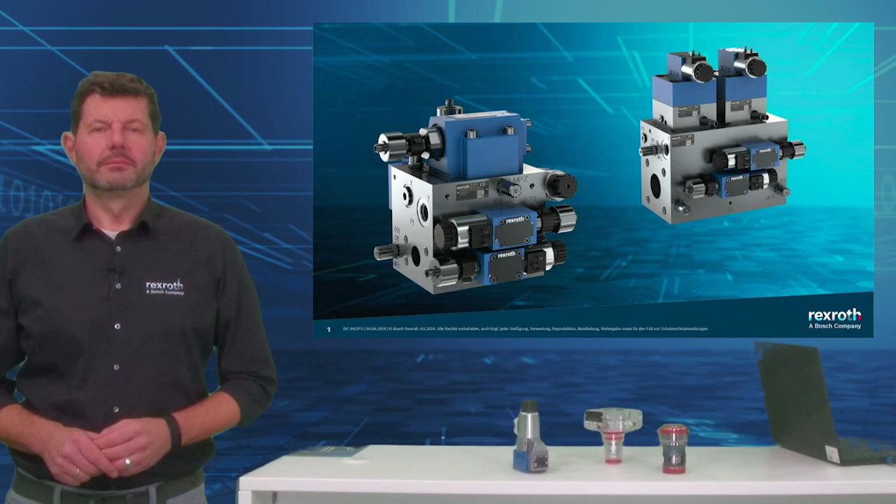In the next 45 minutes I will present you the topic together with our expert concerning system safety in manifolds.

Now it's also time to bring our expert into the discussion. Hello, and it's a familiar face, you may remember him. Hello Marvin. Hi. Great to have you back.

It's almost 1 year that we talked about HSR manifolds and functional setup. Today you focus on the topic of system safety, and we talk about a specific range of products, right? Correct. Today, first of all, also warm welcome from my side. My name is Marvin Mehling.

I'm the responsible product manager for industrial manifolds, and today we will first of all try to build up a common base on the functional safety in hydraulics, and afterwards we will present our newest member in our manifold products family, the so-called STO manifold. Okay, and that means safe torque off. That's what I already learned.

For those of you that are maybe not too deep into the topic of machine safety, I think it's also very much driven in Europe and Germany. I know, that's what I also saw. But I think it would still be worth it to invest some minutes to have a first step into the topic, explain a little bit what's behind that, and then we will go. And again, as always, I would like you to have some application examples, so not only talk about the product itself. Of course.

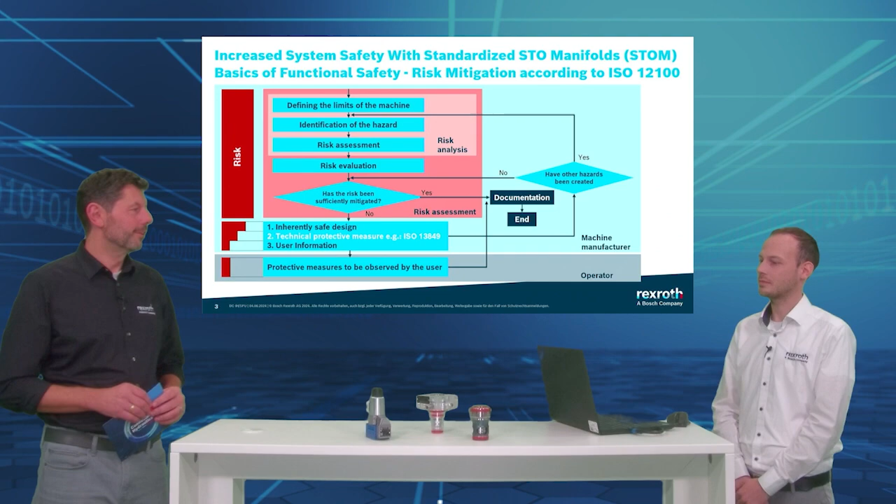So thank you, Stefan. Yes, functional safety in hydraulics usually doesn't matter if we are an OEM and try to build a machine, or if you're an end user and try to retrofit a machine. Anytime we are building a machine, we come to the point of risk analysis and risk assessment of this machine. So we have to get aware of what can happen in terms of personal safety. Can anybody stumble and fall? Can anybody reach out his arm into a dangerous zone of the machine?

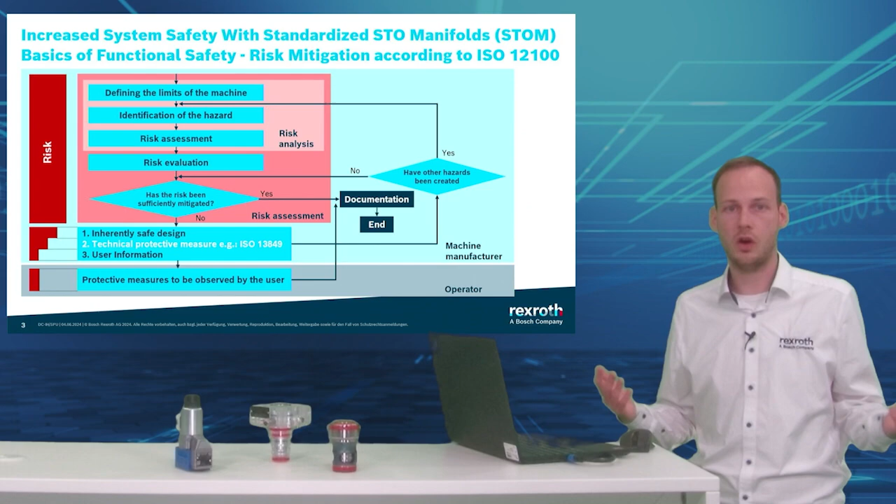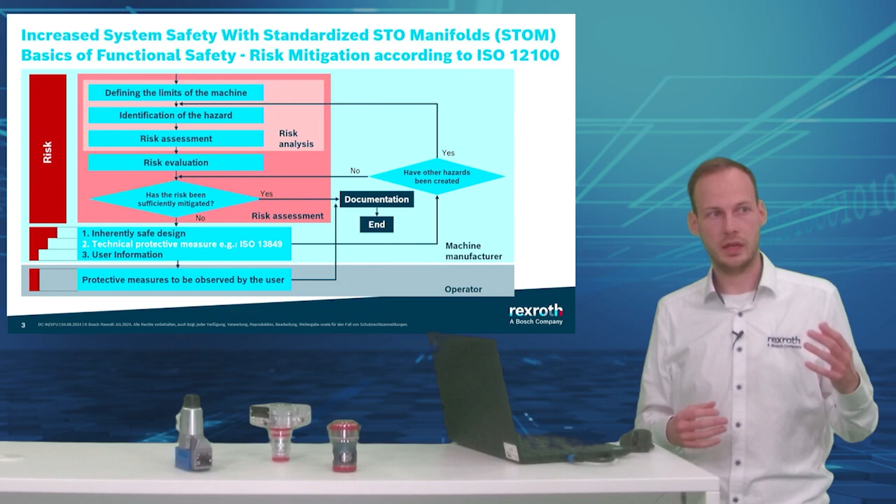And what can we do about this to try to eliminate or reduce the risks and hazards that we have within the machine? When we are in the process of risk reduction, we have several options. First of all, we try to design a machine as safe as possible, meaning if we are able to prevent risks at all with, for example, a fence where I cannot get my arm through, then this will be the first level of solution.

Second level of solution, and this will be our main focus for today, is a technical protective measure. According to different norms, we are capable of using, for example, a light curtain that, if it's activated, gives a signal to an electrical control that afterwards will activate or deactivate valves, cylinders, in order to stop the motion or the risk within the machine, and like this try to make the machine safe. And all of this can be summed up and calculated in a so-called performance level. So how high is the risk of one dangerous failure within a certain time?

And last but not least, a measure of user information. So the last option is, for example, to have information, wear your safety glasses to prevent dangerous situations. And this is, of course, in the responsibility of the operator at that point.

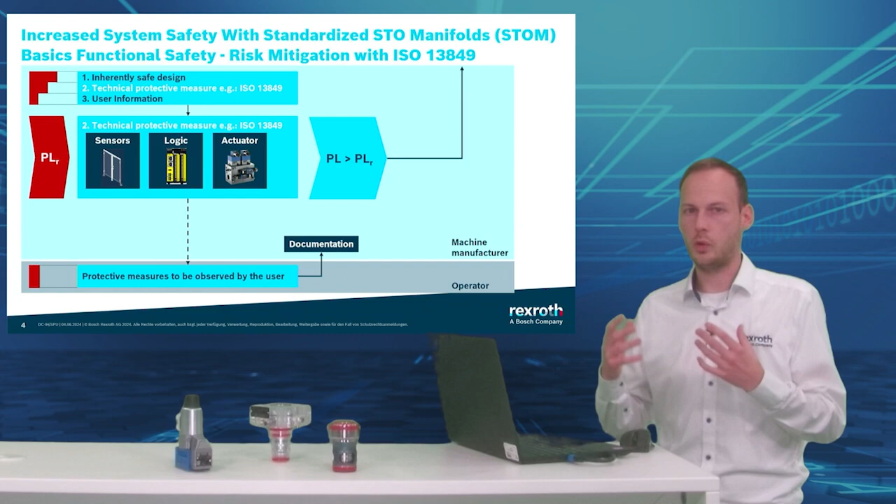But if we now concentrate on the functional safety side and the performance level topic, then we always have the topic of trying to identify the required performance level to make the machine safe. And this can be done with a so-called risk graph. So we're going through the risks that we have and try to identify, do we have serious injuries if something happens, or reversible injuries? How often does the worker step into the dangerous zone of the machine?

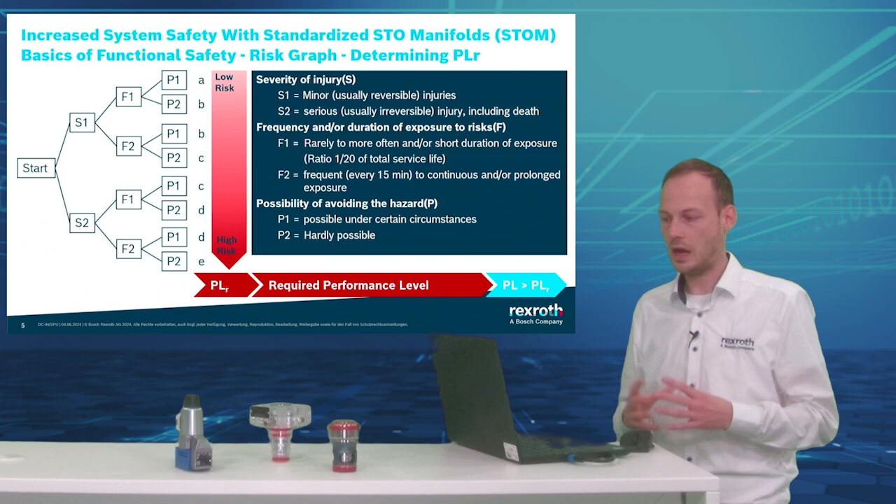And is there the possibility of avoiding this hazard depending on the machine? And like this, we come to a required performance level in level C, D, or E. And this in the end determines how much effort we have to bring into the machine in order to make it safe. Mm-hmm. So I think this was a very good and picturesque description of a complex topic, but thank you for that already.

I would like now to bring you in and have a question for you, because we want to understand on what level you are in this topic. So the first question would be, how often are you facing issues with machine safety in your systems? Is it something that you basically deal with every day or every project that you have, or is it something you think about once a month, once a year, or is this something that never occurs in your business?

Which would surprise me, but let's see. Okay, so we have about 100 participants. 1/3 has voted yet, and it looks like half of the people that have voted have it with every project, every machine, and then declining once a month, once a year. So still, I think not everybody is dealing with that every time. So I think it would be interesting to see that.

And the follow-up question would be, what challenges and hurdles do you face in the context of machine safety? We have a multi-select here. So you can select all these possible answers, like identification of hazards or safety measures, determination of the level. Yeah, we learned there are some different performance levels, and also proof of safety of performance level. So this may take a little more time to answer. Let's see.

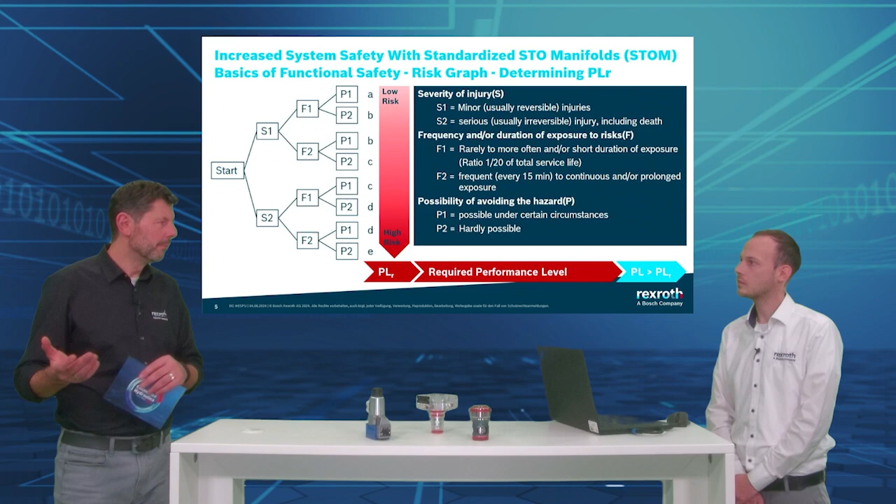Now, talking about safety as a topic, I think there's even more to learn about. We have even a web seminar we will talk about later on that we've done already. So we won't go into that too deep. We'll now switch a little more to the products and to the manifolds that you are responsible for. So STOM, Safe Torque Off Manifold, is kind of an individual product group you are now setting up, right? Correct. It's a whole new product family, and we will try to explain it from the system side.

Okay. So, for example, if a customer has a larger or even central oil supply, then usually we have different machines or machine sections that should be individually hydraulic controlled. And the STO manifold acts as an area shutdown to interrupt this hydraulic pressure supply from the volume flow, also from the pressure side. And in the end, with this, try to help you fulfill your requirements on personal and machine safety according to the norms that are there, the ISO 13849 and up to category 4 and performance level E.

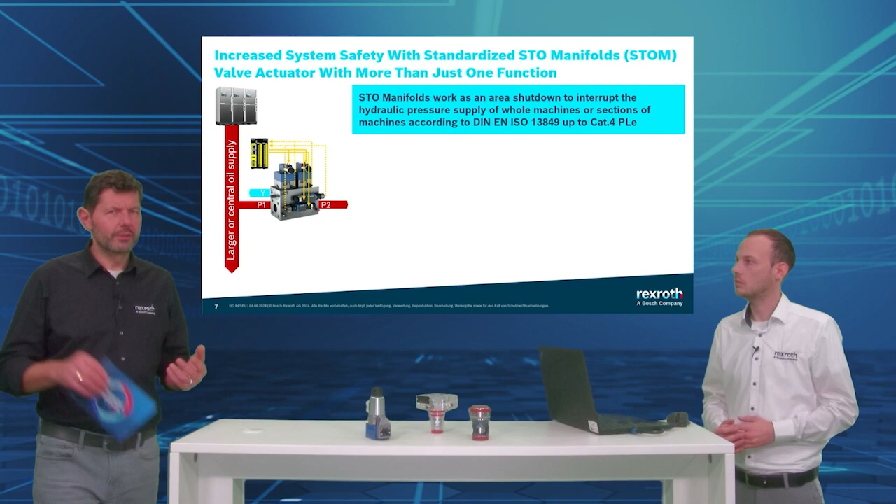Again, category 4, so performance level E, I understood this is the highest possible. What about category 4? So different performance levels can only be achieved if you have a certain system architecture within your system, meaning that, for example, one valve to shut off the manifold is not enough to reach the highest performance level. So the category describes that we, for example, need 2 of the valves and both of them monitored in order to fulfill the performance level E, that, as you said, is the highest level of safety that we can reach in the functional hydraulics. Okay.

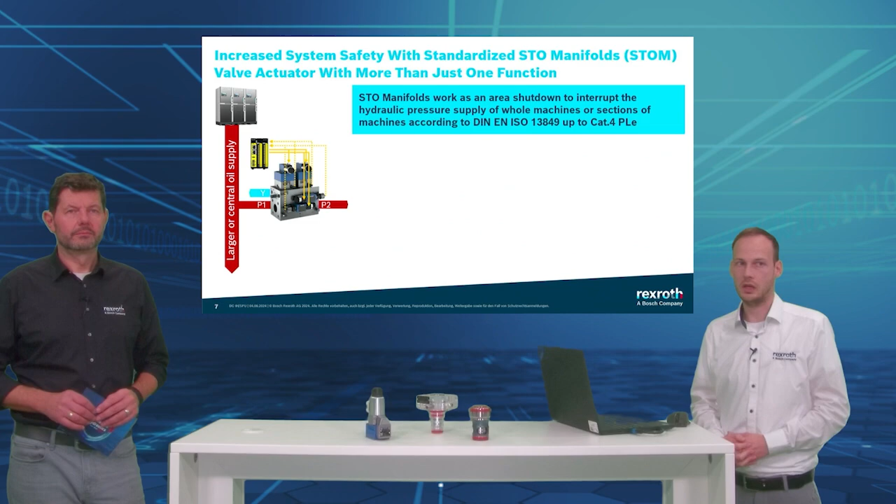If we go on, now what does the manifold do? The STO manifold, as we told, is able to fulfill a safe torque off. Safe torque off is, of course, an electrical term, and in hydraulics we would maybe call it safe energy separation, meaning to cut the flow of the fluid, to cut the volume flow, the pressure of the system, meaning we cut it off from P1 to P2.

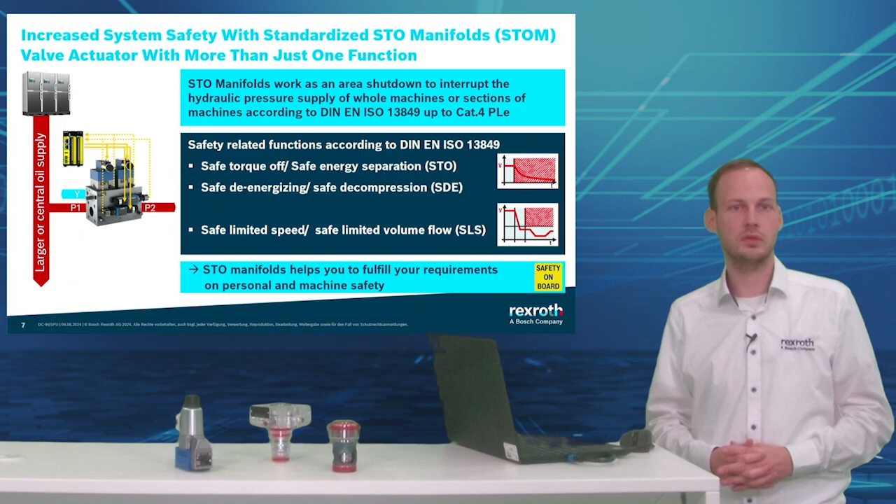And as a sub-function of this STO, we also have a SDE function within the manifold, meaning a safe decompression. So the P2 line will automatically be also decompressed to the leakage port. Our North American colleagues may know this as block and bleed function. And last but not least, we also have the option to use the manifold as a safe limited speed, or because we don't have a cylinder here, use it as a safe limited volume flow function. So in the end, we will help fulfill personal and machine safety requirements according to the current norming situation.

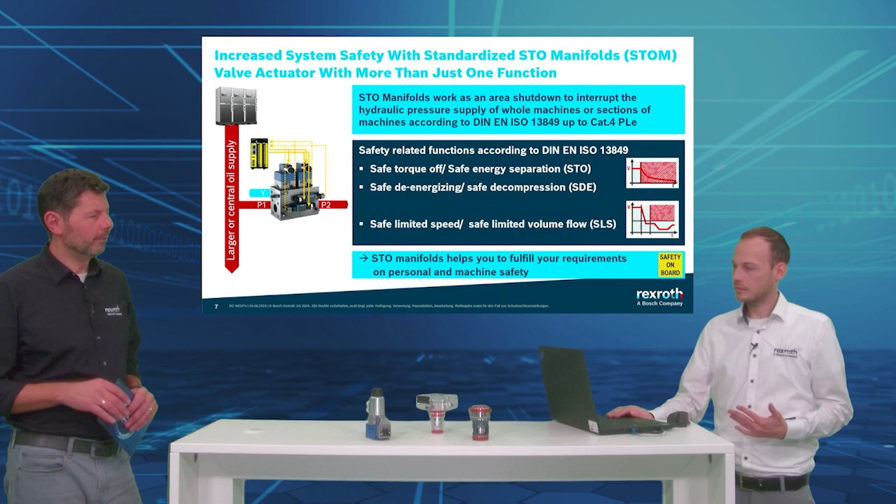So talking about the products, let's maybe give an example. I think you prepared one example. What kind of applications are you focusing on here? Yeah, giving more pictures. I think the main applications would be, as I said, central oil supplies, testing areas, metallurgy plants, really where we have volume flows higher than 200, 500, or even 1,000 liters a minute.

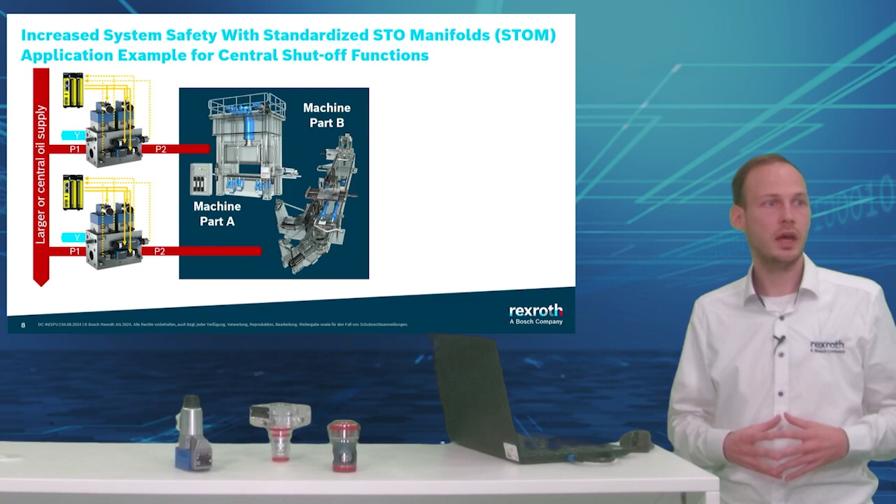Where hydraulic really is fun. Yeah, definitely. And if we look at that, the task is that we usually have different machine parts within the whole area or within the whole plant. So the STOM enables us to block these machines or machine parts individually. And by that, we are capable of blocking, for example, machine part A, while machine part B is still operating.

In machine part A, we can do a safe loading or unloading, a safe maintenance, or even retooling the machine, while, as I said, machine B is still operating. And this, in the end, doesn't only give us machine safety, but also can increase our system availability. Okay. Before we go into the system setup, I think you want to now show the different phases and how it contributes to the benefits.

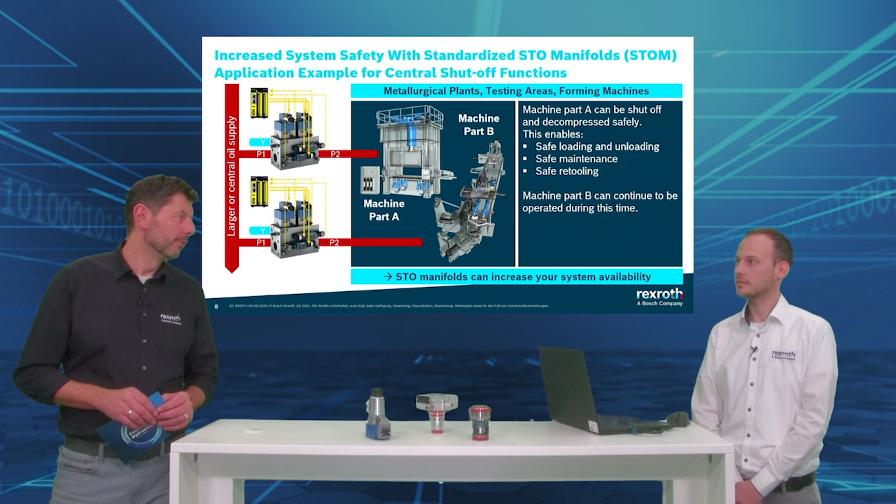And the last question concerning the levels. I saw that 20% said it's hard to identify the level, but if you have, which required performance level concerning the safety function is relevant for your work? And it looks like, okay, it's changing a little, but still PLD, performance level D, is kind of the majority, and then it's mixed between C and E. So a little different to Germany. I think here the topic is a little more focused, but still quite high.

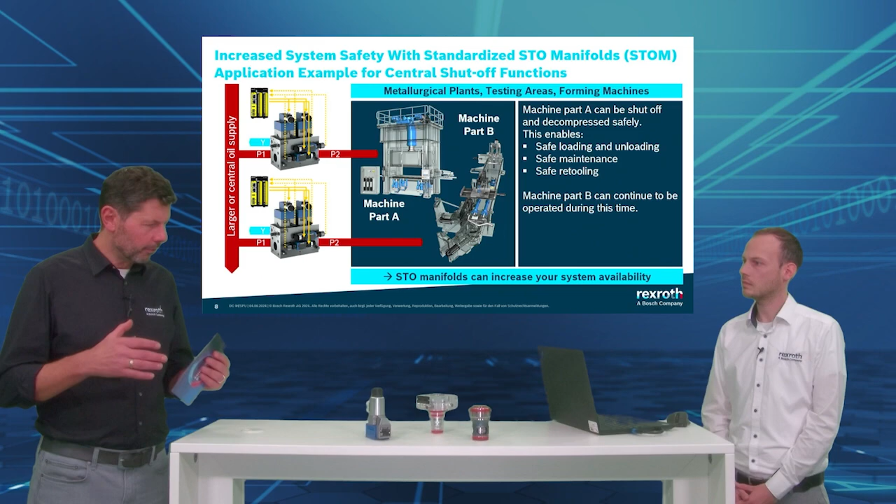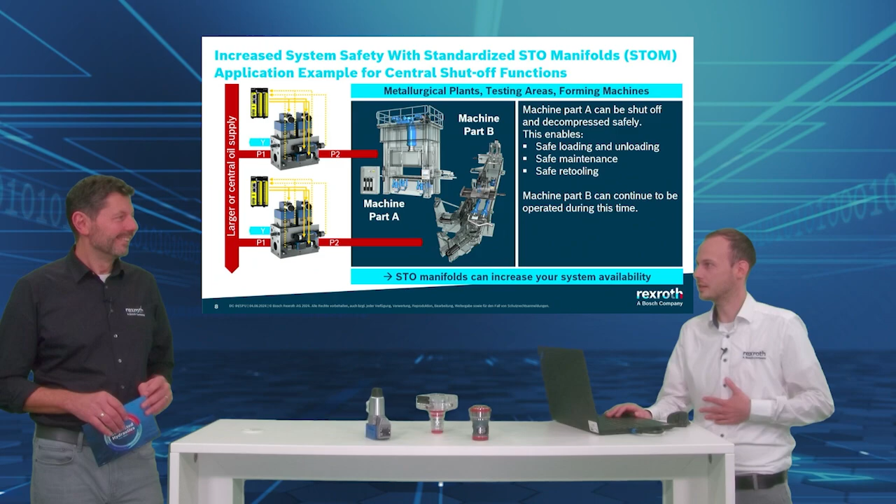Yeah, very good feedback, definitely. We will relate to it in a second. Okay, now from a typical system setup, you will go through the phases of functionalities, starting with the idle state. Yeah, definitely. So we are hydraulic people, so we also would like to understand the product from its schematics.

What you can see here is the schematic of an STO manifold capable up to category 4 PLE. On the upper side, you will see the two main valves, active logics, called LC2A in our language. And on the lower side, we have two more size 6 valves to do a bypass function. Of course, in the default state, all of them are de-energized. The spool monitorings are active and giving a signal.

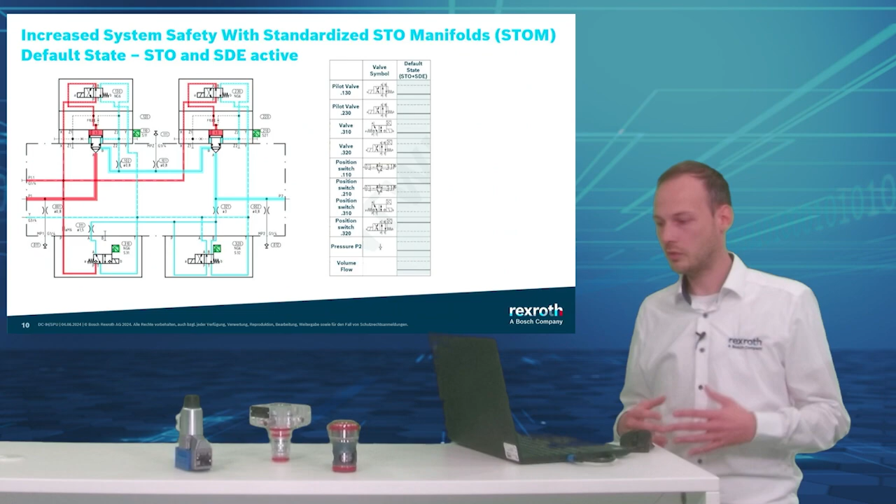And I marked it in different colors. From the P1 side, we have pressure that is used to also close the valves safely, while the P2 side is decompressed to the leakage port, and that's the default state. And if we want to start up the system, we usually have a topic in bigger and central oil supplies. We have big dead volumes, long pipes with bigger diameters, meaning just opening the main valves will give us hard switching strokes.

That's why we implemented the bypass functions: when we activate both of the bypass valves, we are capable of doing a pre-compression of the P2 line, meaning we slowly build up the pressure within P2 until we have the same pressures in P1 and P2, and only afterwards we start up the main valves and therefore the system. This gives us the possibility to damp switching strokes, increasing the lifetime of our components, and of course reducing noise.

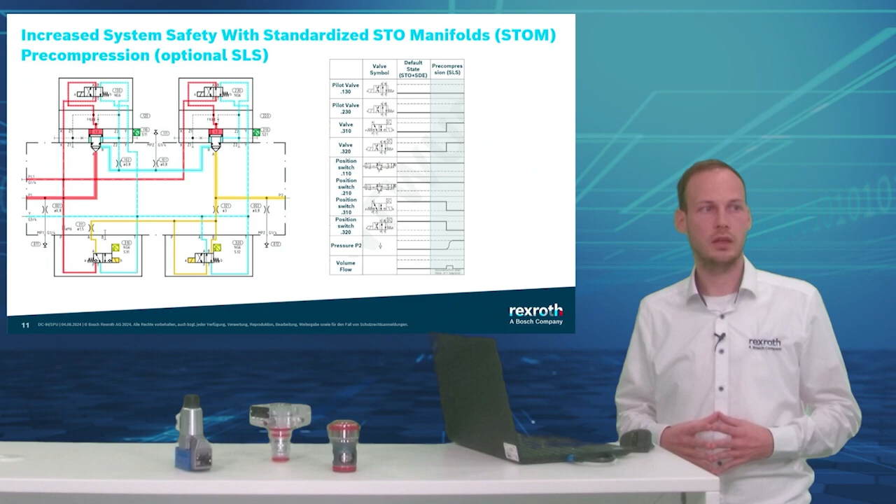To show you this in real life, we also brought a video from our test bench where we tested our manifolds before start of production, and that's what we want to show you now in the next short video.

In customer systems, metallurgy applications, we have dead volumes of several dozen or even 100 liters, which will increase the stroke, of course. Could even be more effective. And therefore, these pre-compression functions are very, very important in central oil supply. I like it also visually, could really see the level of noise, but also the deepness of movement.

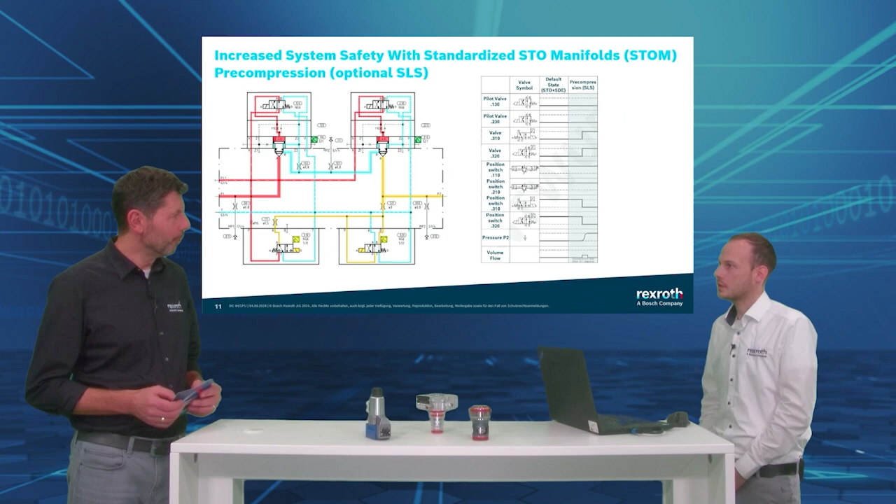And yeah, so this was pre-compression, and now we go to the free flow state. I think this is full throttle, right? Of course, full throttle. So after we did the pre-compression, we of course want to have the free flow. Therefore, we open the two main valves. They are fully opened, and then we can go through the manifold with full volume flow. Doesn't matter if it's 300, 800 or 1,000 liters a minute.

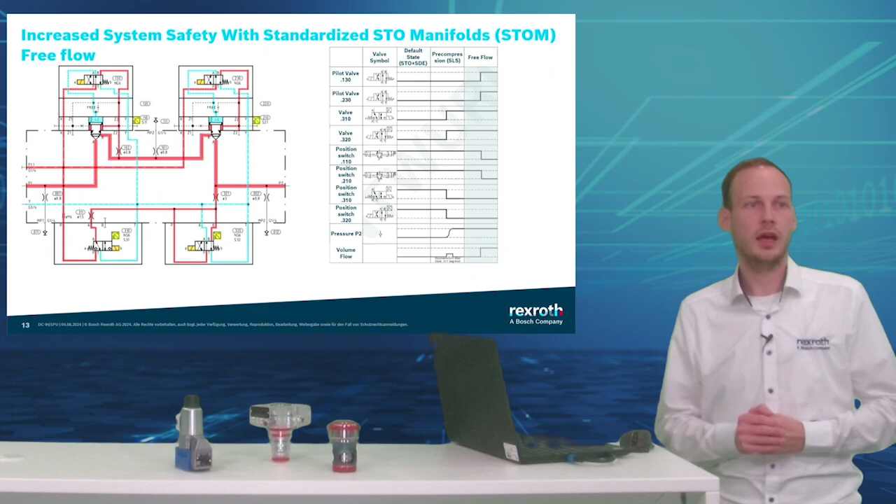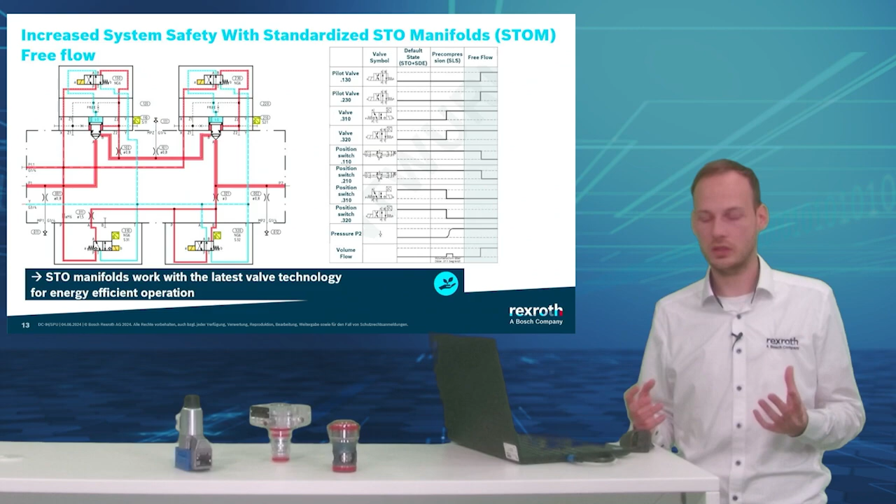So what's important at that point, of course, energy efficiency. With our STO manifolds, we work with the latest valve technology to really have the most energy efficient operation. You can see the flow characteristics for each size of manifold. So our manifolds are not only available in one single size, but in different sizes to fulfill the required volume flows in your system.

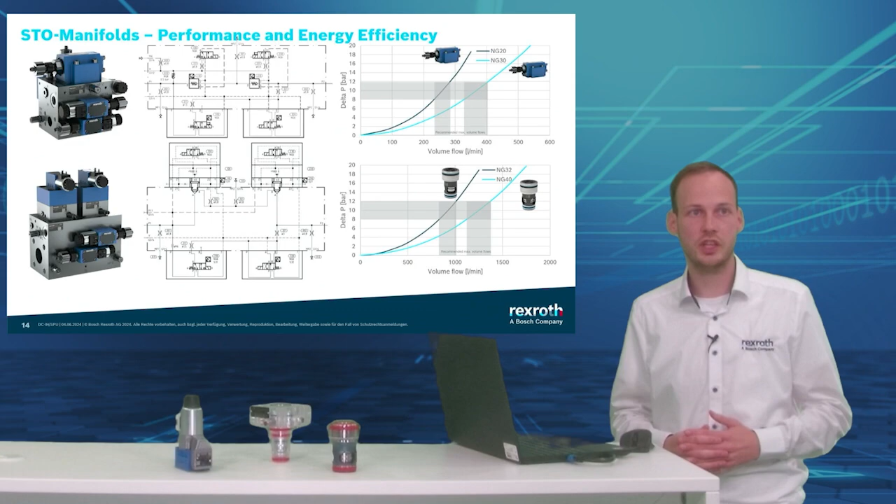Meaning on the lower side, you can see the one in size 32 and 40 with active logics, and on the upper side, you can see the smaller manifolds with unlockable check valves in size 20 and 30. What is the typical flow area? Is this the gray ones? I think typical flow areas will go from 200 up to 1,000 liters a minute. So have a look at 1,000. With 1,000 liters a minute, we will have around 12 bars of pressure loss with our active logic valves.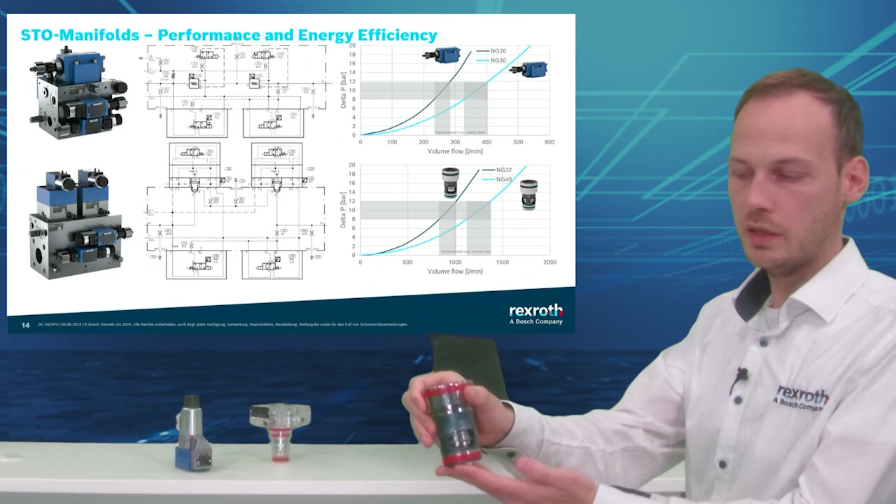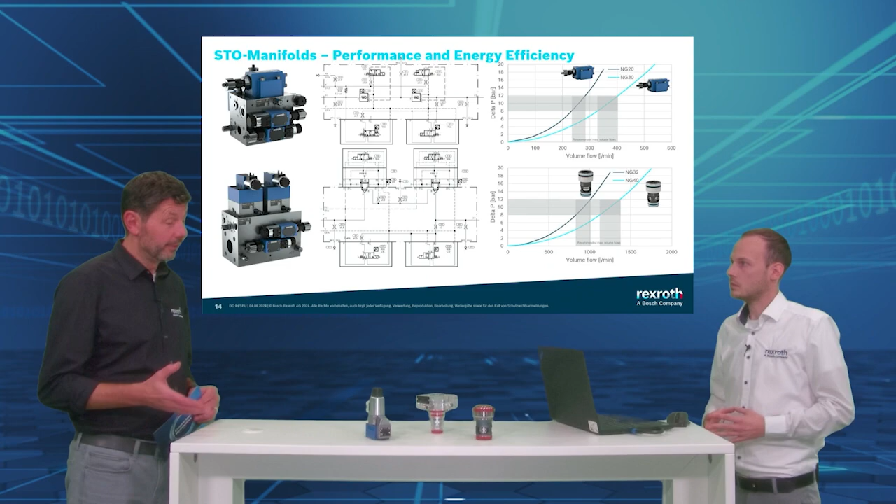Now, what's special here? With our active logic valves, we work with the newest series, meaning we not only have a standard hole, but it is more like a long hole, and therefore gives you energy efficiency increases of around 30%. That's a lot. Wow. If we think of the volume flows that we have here. So that's already really impressive. Also, I like the demonstration of the sound difference, and the movement obviously is a lot better for the system.

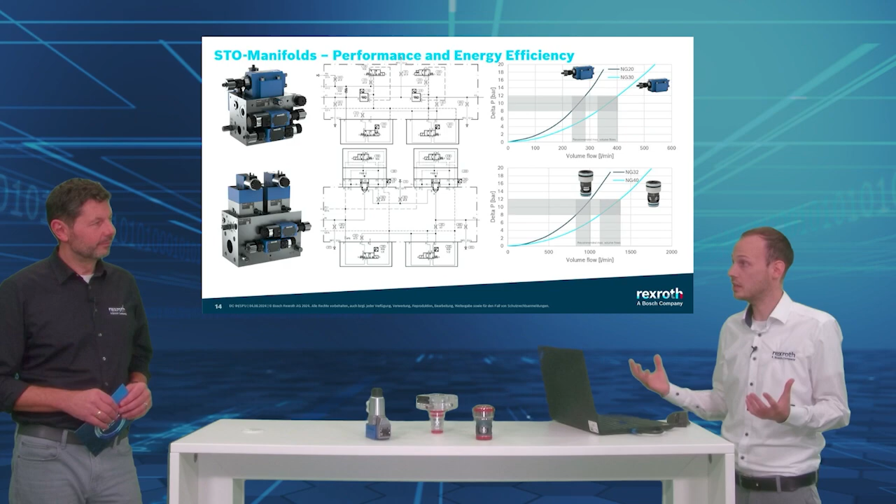So already a lot of nice efforts and benefits, but still we haven't talked about safety too much. Correct. Of course, if we now really put our hand into the light curtain, we come into the fail-safe mode. Before we do that, I will have to add one information to also give you an easy integration into your system. We solved the manifolds from the design side with P1 and P2 in one single axis. This gives you the possibility to have an easy and quick installation from the hardware side, and also from the electrical control side. All of the manifolds, doesn't matter what size, are solved identically. So once you have the code to operate the manifold, you can double it, doesn't matter what size you have.

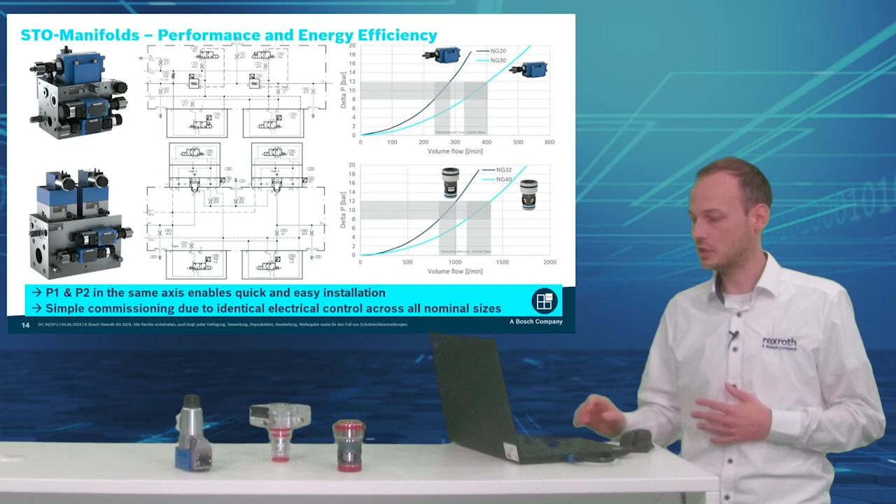And now we come to the fail-safe mode and look at that from the schematics. So if I put my hand into the light curtain, all of the valves will directly be de-energized. This means the two bypass valves go into default state and will directly decompress the P2 line to the leakage port. Secondly, the main valves will also be de-energized, and they will not only shut down passively, but they will be actively pushed from the P1 to close as fast as possible.

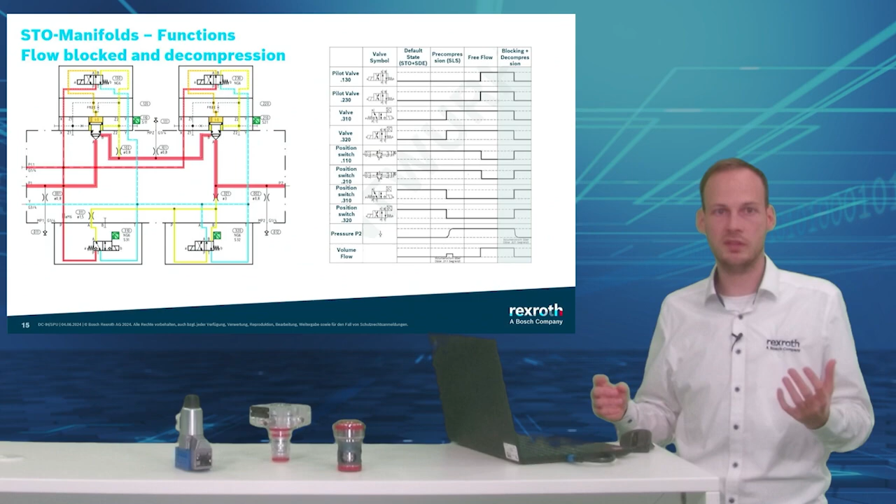And this is very important to have not only a safety function that fulfills a performance level, but to really have the performance to shut down the machine as fast as possible. And during the development project, we started with 500 or 600 milliseconds of closing time. We are now at a point that actually for any operating mode, we reach closing times of below 300 milliseconds.

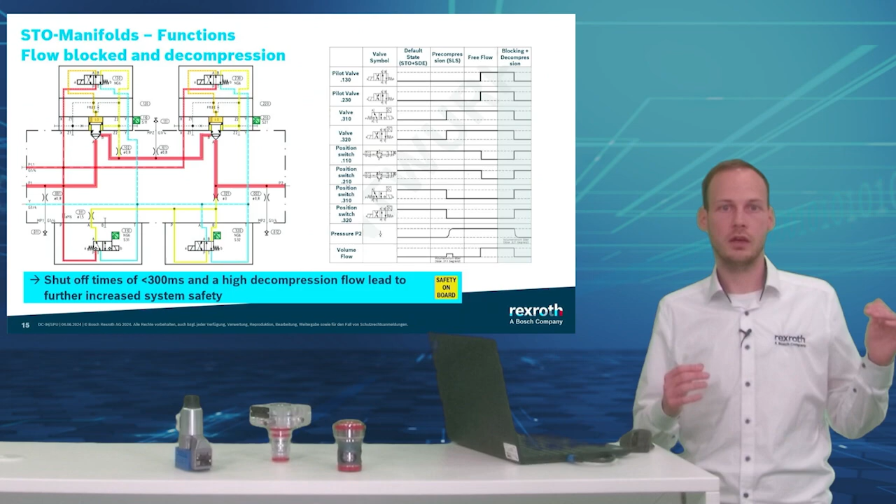And the best thing is, the higher the pressure, the faster the manifold will close because of the LC2A valves. So the one effect helps the other. That's what I understand. Definitely. The higher the danger is, the faster our manifold will react, which in the end gives the safety that we need as workers within the plant.

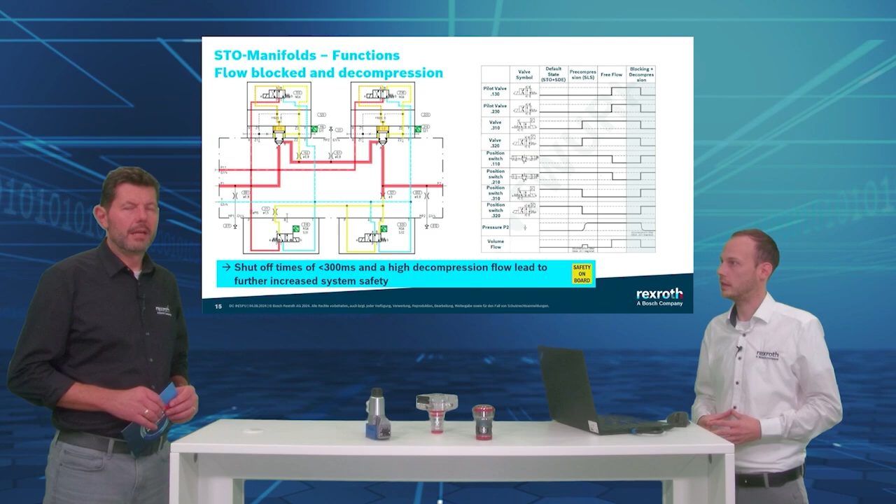After this phase, we will start again with the default state, right? Correct. After this, we are back in default state. All of the valves are monitored. P2 is decompressed, and the worker can actually go into the machine to do his job and to do his job safely.

Okay, that's good. Now we said let's have information about the performance level required, and we saw it's kind of focused on D. E and C was also mentioned. I think what you present here, we said it's very high level, performance level E, category 4. Not everybody needs that. Is there anything for the other people that do not need the highest level?

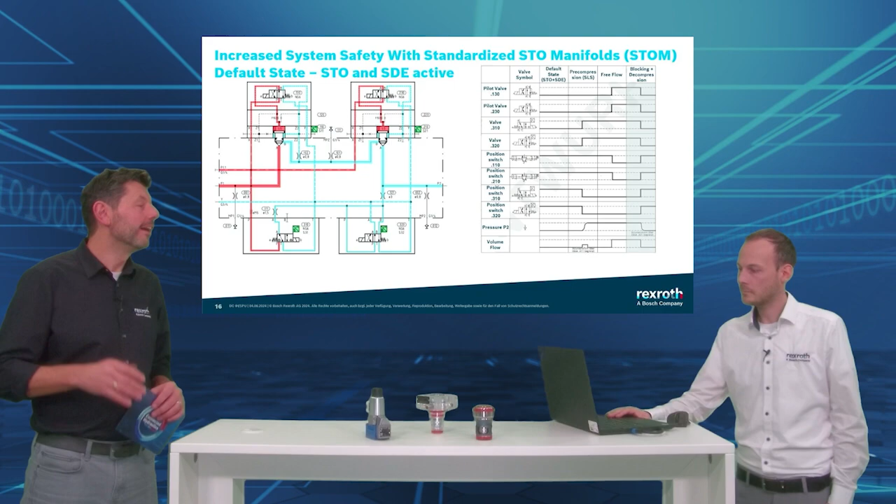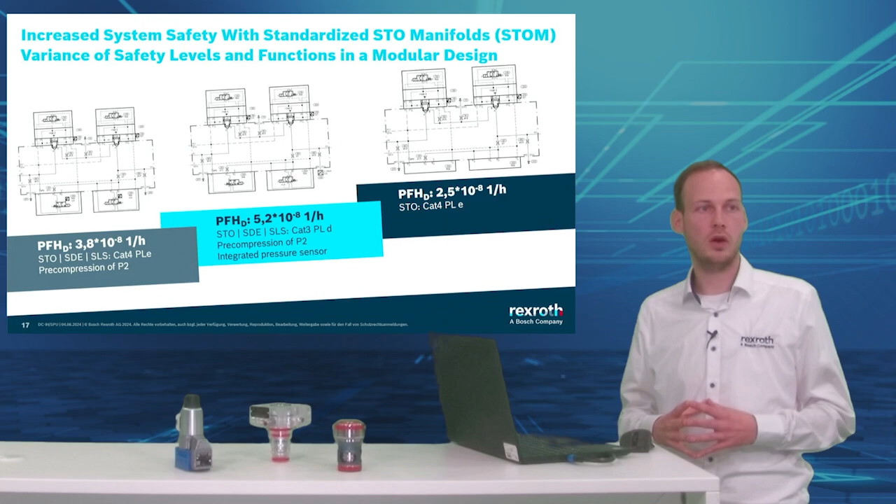Of course, we also made our thoughts about that. So if we look at the different levels of performance, we just explained the manifold with category 4 and performance level E, but the manifold with the exact same drilled block is also capable of fulfilling category 3 and performance level D. How do we do that?

It's just simply that the bypass valves are not monitored directly, but we have a pressure sensor within the measuring port of the P2 side. And by this, we are capable of doing a cyclical test of the bypass valves, and therefore save some effort on the monitoring, but still be safe with performance level D in the system.

And if you actually do not need the bypass function to pre-compress or decompress the system, then you can also go with the, let's say, base function and some cover plates on the size 6 valves. So you will just have the STO function, and that's it. Okay, so you offer basically a broad range of different safety levels and applications in that case.

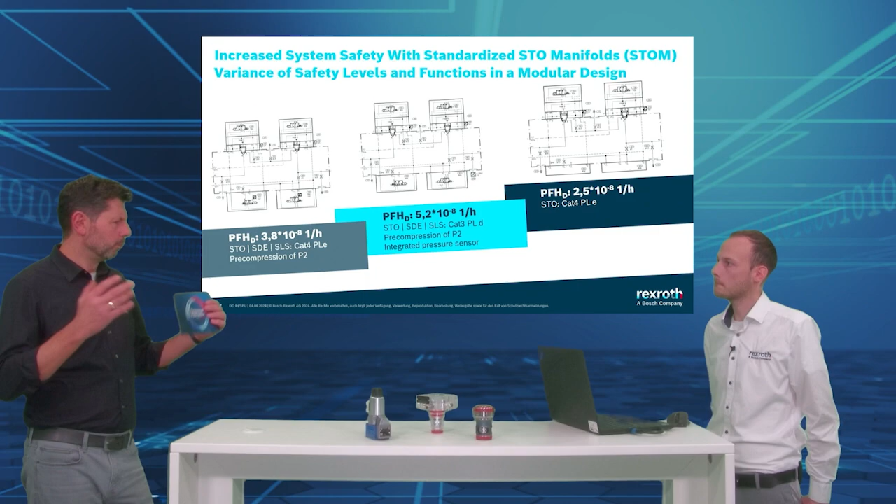So when you say this is a new product group or a product family, how many real products do we have behind that? I understand these are kind of standardized, so you can order them. They will be able to be ordered after the go live, but just what is the range of the portfolio? Well, actually, it's not too much. So if we look at the variants of material numbers, then it's quite easy to pick a STO manifold.

So first of all, we need to know the fluid, and therefore what sealing we can use. I now chose NBR, and I chose size 32 because we stick to the example of 1,000 liters a minute. And by this, only 3 numbers will be left, and then I just have to think: do I want to have the decompression and compression function or not? And do I want to have it in performance level E or in performance level D? And like this, you will come out with one single material number, and that's it.

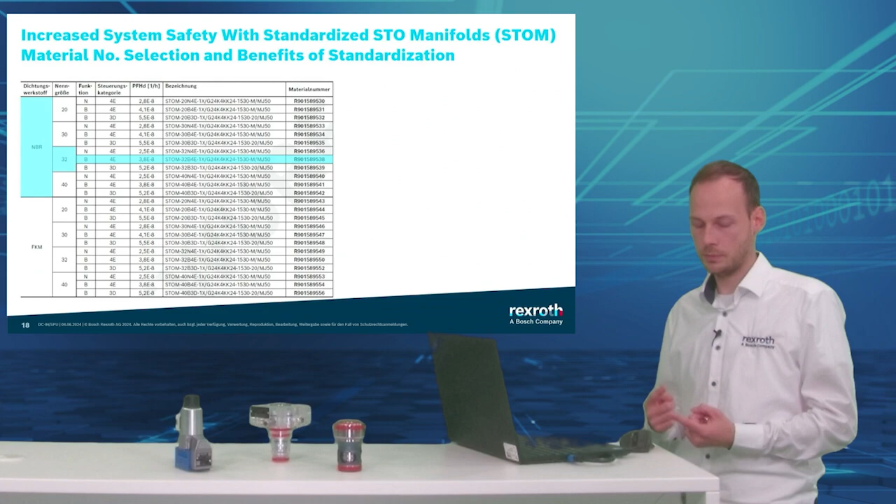Okay. And this is basically part of the data sheet that is not available right now, but you said to me yesterday it's in preparation. When would you expect to have it available? Well, the data sheets are actually finished. They are currently in translation, and as soon as we have the English translation and have made our corrections, because all of the functional terms are difficult to translate, then we will upload it directly. I assume this will be either mid December or maybe beginning of January.

So if you're lucky, you will get it as a Christmas present.

I think you highlighted also some advantages. Obviously, a lot of hurdles that we asked about are now dealt with. I would say if I pick, for example, the definition of the level, but also the risk assessment. So there's a lot of knowledge already inside the development, and just by picking based on the requirements that you have, I think you already have a lot of knowledge that you don't have to set up in your company.

Yeah, correct. We not only have the benefits of the product itself, but also the benefits of standardization and pre-work that we did with the product now. So if you're in the process of risk reduction and you need a manifold that fulfills this performance level for this safety function, then you just pick it and you're finished.

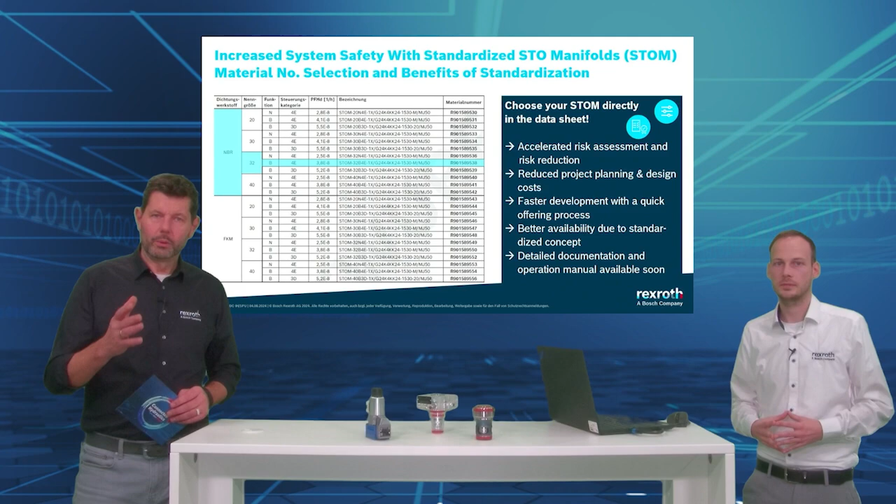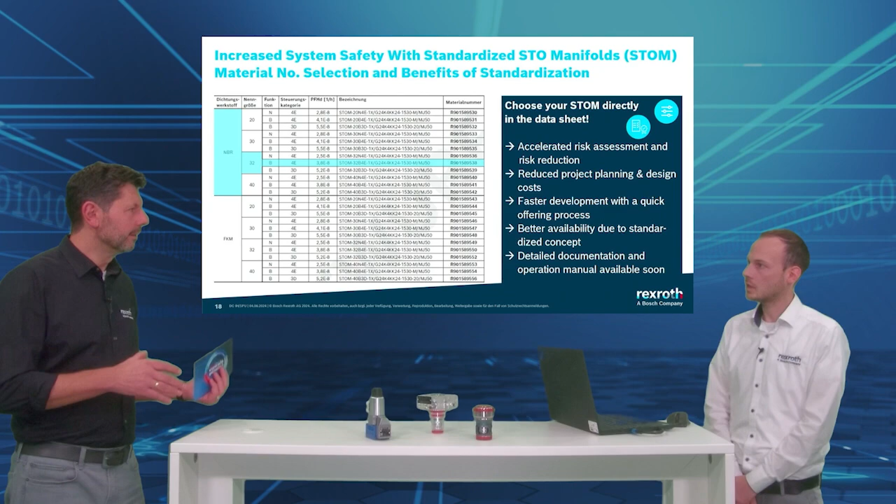So now these are some advantages just by picking the data sheet. So could you maybe sum up as a final result, what are the overall advantages of this application, of these possibilities? We really talked a lot about the personal safety as well as the energy efficiency topic of the manifolds. We also have additional benefits. For example, if you have special fluids in your metallurgy application, if you need an HFC or HFDU fluid, we are able to fulfill this with the right pilot valves.

We have a leakage-free shutoff from P1 to P2. The design of the manifold is really, really compact. And in the end, by the standardization, we profit from reduced project planning and design. We have a faster development. You as a customer have a faster development. And in the end, also an optimized supply chain, thanks to a fully assembled, tested control block.

So I think on one page you see basically why you should think about the solution, and I think that's already it for the moment. I think it was a good insight, starting with some basic know-how, talking about the STO manifolds. We have nice application examples. I like this noise example, and at the end I think we went through every phase and found several benefits that are combined here.

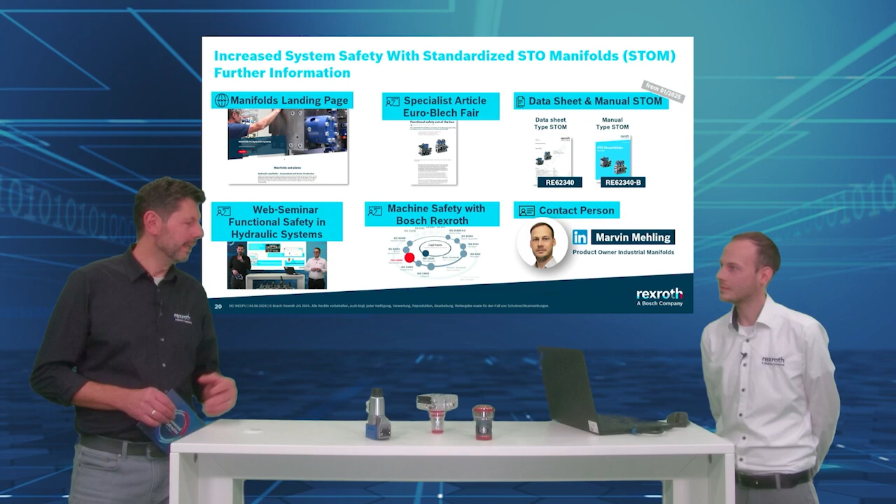And I heard next year there will be the official go live, so all the best for that. I think we already found today there's huge interest in this product. You had a good feeling about the market needs. And before we go into the end, you already said you have prepared some more questions. As there are no more questions coming in the chat, what else would you like to talk about? I think some of them came up already.

So if any one of you is interested and needs a manifold with an STO function, are they available already? Well, the official SOP, start of production, will be together with uploading data sheets, manuals, and really going live with the product. If you have an application and you need a quote, of course, we will support you in preparing an offer, and in the end offer an STO manifold to our customers. So sales has actually started.

Can I get a safety calculation? Maybe this is a more typical German or European question, but maybe it's also necessary in North America. When we have to prove our performance level of the whole function, we often need a so-called SISTEMA calculation that proves our safety level. And of course, if a customer decides to go for an STO manifold, we are also able to provide these calculations. We did all this during the development project, and therefore we can also give it out to our customers.